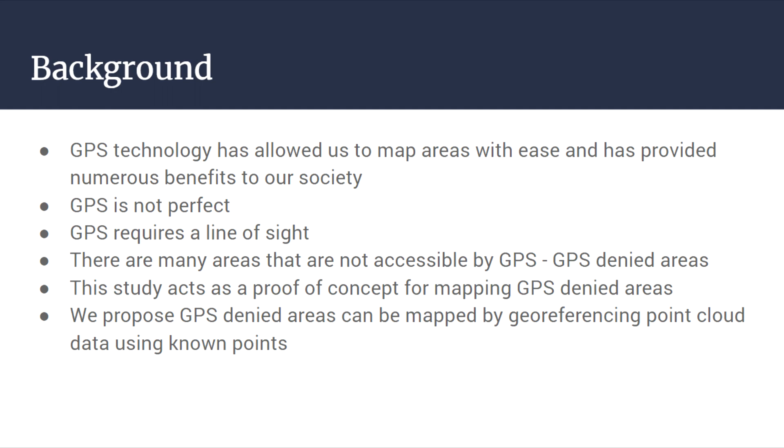The study aims to act as a proof of concept for mapping GPS denied areas. We propose that GPS denied areas can be mapped accurately by using a LiDAR to create a point cloud, which can then be tied into a coordinate system by georeferencing it with known points.

So why is this important? Mapping GPS-denied areas can prove to be beneficial for many different reasons. Perhaps the most important way it can prove beneficial is that it could be done quickly and remotely. It could aid first responders or military personnel, increasing situational awareness for potentially dangerous operations. Mapping buildings can also be useful for simple visualization purposes. Creating a 3D model for a building can be used for potentially limitless applications, ranging from tourism to real estate to construction.

Next, we'll talk about the research question and our hypothesis. In this study, our goal is to answer this question: can GPS-denied areas be mapped accurately? We hypothesized that yes, GPS-denied areas can be mapped accurately because LiDAR scans can be taken in a GPS-denied area. These scans can then be tied into a coordinate system by georeferencing them to known points collected with an RTK GPS. Now we'll talk about our methods section.

The study site we chose was the O&M building on campus. We started on the outside and then traversed into the first floor of the building. We chose this building for a few different reasons. Firstly, the building has a lot of details both on the outside and inside. These details are important because when georeferencing data, it helps to have prominent features that can be distinguished in point clouds. For our experiment, we used a variety of equipment.

For our LiDAR scan, we used a Faro X30 laser scanner and a tripod. For our survey, we used a Leica RTK GPS and Leica TS15 total station and survey pole. We used a 360 prism to mark our backsight and foresight. We also used a measuring tape to measure our instrument height.

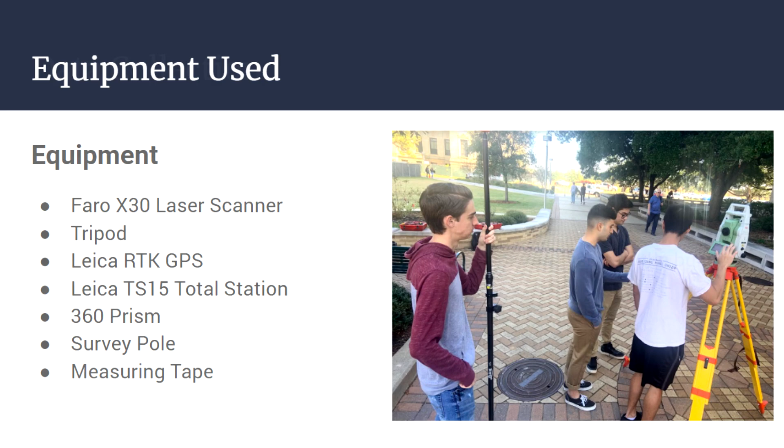For our data collection, we started off by collecting our LiDAR point cloud. We did this with help from Dr. Glowacki and a graduate student, Benjamin Bask, from the Department of Architecture at Texas A&M University. We conducted 3 scans outside, starting on the quad outside of O&M, and slowly worked our way towards the front door to the building. We then conducted 1 scan inside.

With our LiDAR data collected, the next step was to conduct a survey that could be used to georeference the LiDAR data. We used an RTK GPS to establish 2 known points. Before we were able to use the known points for the total station setup, we had to convert the northings and eastings into latitude and longitude by converting US feet to meters.

Once we set up the total station over one known point and shot the other known point as the backsight, we used reflectorless scanning to shoot 10 points outside of the building on distinct features that could be easily identified in the point cloud. We then traversed into the building using a 360 prism to identify a point inside. The total station was then moved onto this point, with our initial point being used as a backsight. We then used reflectorless scanning to shoot 13 more points inside the building, again using distinct features that would be easily identified in the point cloud.

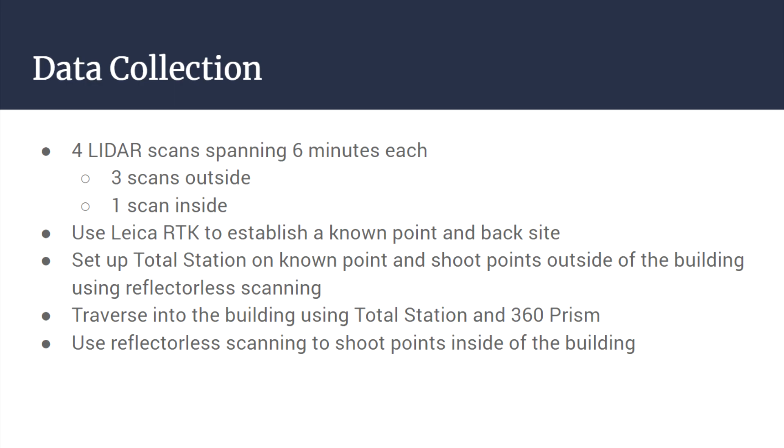These points would be used to then georeference the LiDAR data that we collected.

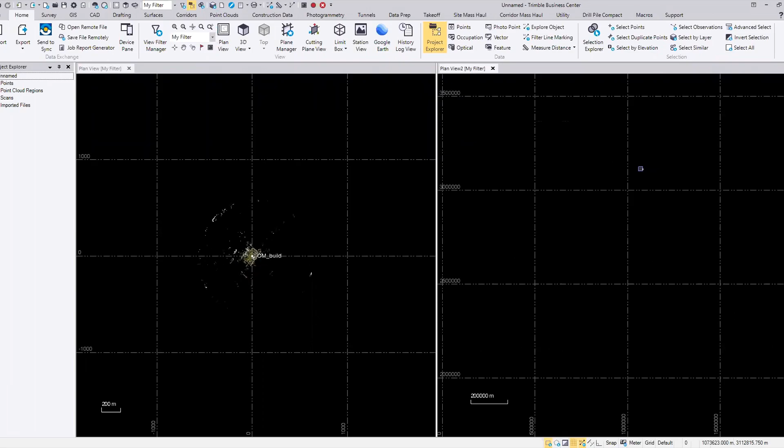For our data processing, we switched around between a few different programs before we eventually settled on Trimble Business Center. We tried Global Mapper, and we tried Autodesk Civil 3D, and IntelliCAD. The issues we faced with those were licensing issues, lots of licensing issues. But we eventually got it done in the Trimble software, in Trimble Business Center, and the first thing we did is we pulled in the data.

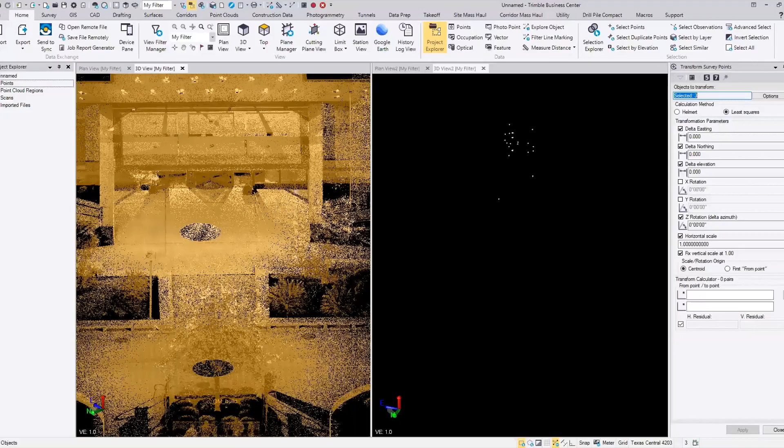Then we set the projection. For this project, our survey data was in NAD 83 State Plane, Texas Central. So that's what we set it to, and then we created two different 3D views. It's important to note these two views are on the same workspace. On the left you can see our LiDAR data, and on the right is our survey data, which is tied to a coordinate system.

Before we get started on the data processing, it's important to note that the preliminary processing of the LiDAR data was conducted by Ben Bask and Dr. Glowacki in the Department of Architecture. They were nice enough to let us borrow their Faro X30 3D scanner, so that was really awesome.

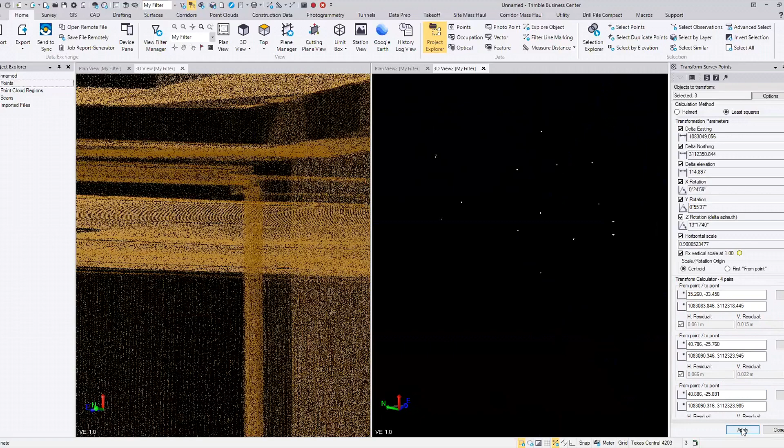Here in the video, you can see we started to georeference the LiDAR data to the survey data. This process is exactly the same as georeferencing to 2D data. You just click the point on the LiDAR data and then match it up to the points on the survey data.

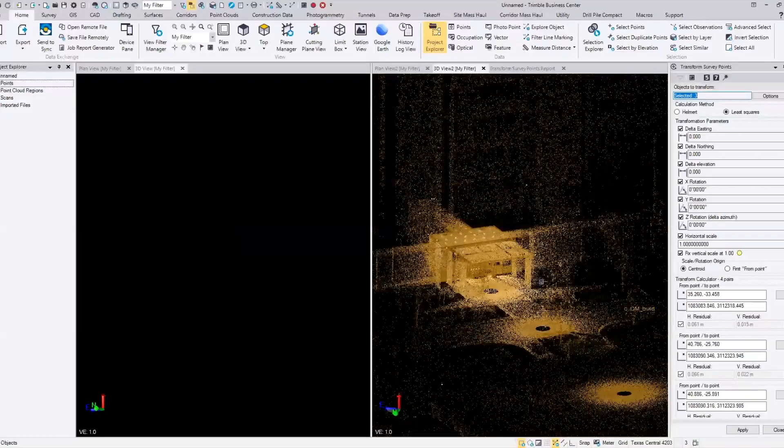You can do this as many times as you want, as long as there's a minimum of 4 points. After a while, you start to see diminishing returns, so you don't want too many points, but you want to make sure you have at least 4.

Once you georeference all the points, you just click apply, and then you should see the LiDAR data shift to where the survey data is.

Right here, we're just going to click yes, and we're going to create the transformation results page—a transform surveys report, or survey points report. This is going to tell us our residuals and how everything came out. We'll get more into that later and show that a bit further on.

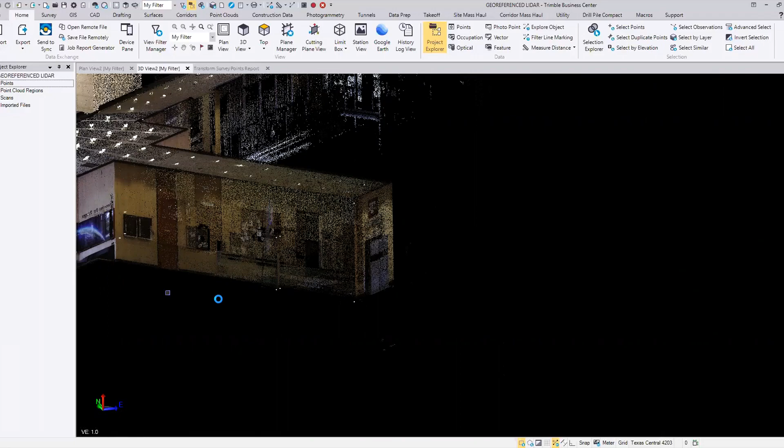Right here you can see our LiDAR data was pulled over and matched up with our survey data. You can see the big white points right there—there's our front sight, and our back sight is right there also. So it matched up pretty well, and we had pretty low residuals, so that was good.

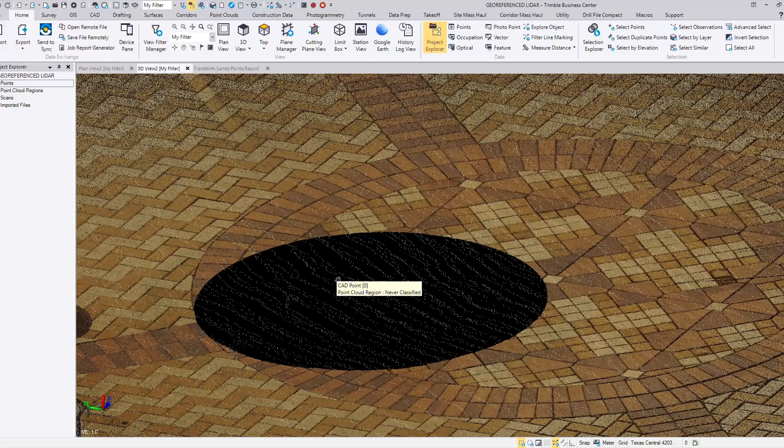Here you can see the inside of the building. Again, a lot of the survey points are matched up. You can see 4 points right there on the elevator door, and then 2 points against the back wall, up in the top corner and in the lower corner.

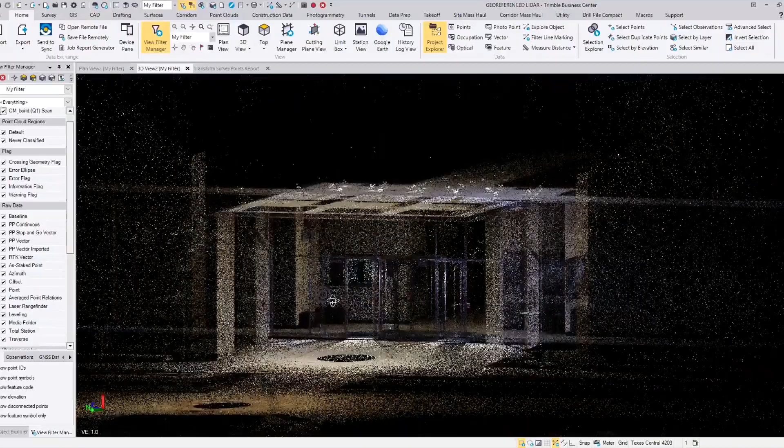There's our front sight—that's where our initial total station setup was, and that's also where the Faro LiDAR scanner was set up as well. That's why there's a big black circle over there.

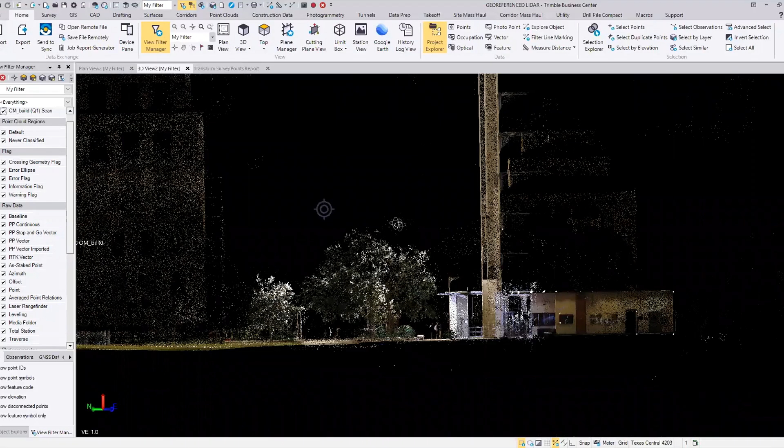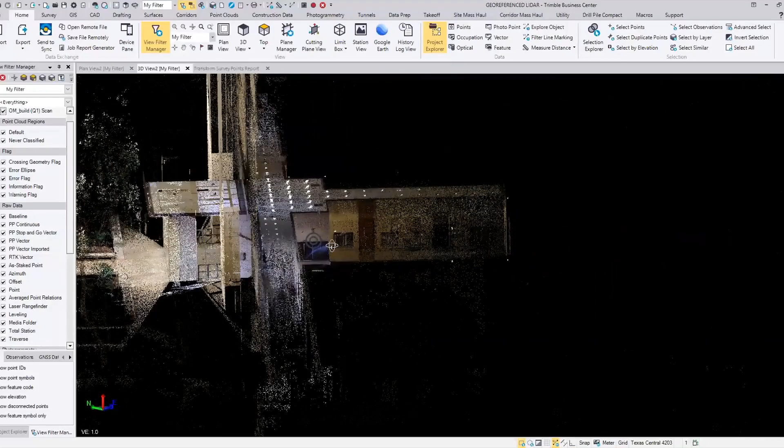Here we're removing the LiDAR data and then showing it again, to demonstrate how our survey points line up along with our LiDAR data. There's all our survey data. Then we're going to add the LiDAR layer back, and you can see it's all matched up really nicely.

So this is our transform survey points report. We created this after we finished georeferencing our LiDAR data.

The big thing I want to point out here is our overall residual in the top left, and the standard deviation was 0.069 meters. So we had very low residuals, indicating that our data was georeferenced pretty accurately. That's really good to see.

With this in mind, it's important to note that the equipment we were using was LiDAR as well as RTK, state-of-the-art equipment. That's why our standard deviation and residuals were so low, less than a tenth of a meter of accuracy. So that's very important to note.

To conclude, initially our study site was going to be Inner Space Caverns in Georgetown, Texas, and we were only going to conduct a survey and traverse into the cave to map a route. But this didn't really pan out due to issues with the equipment and time constraints.